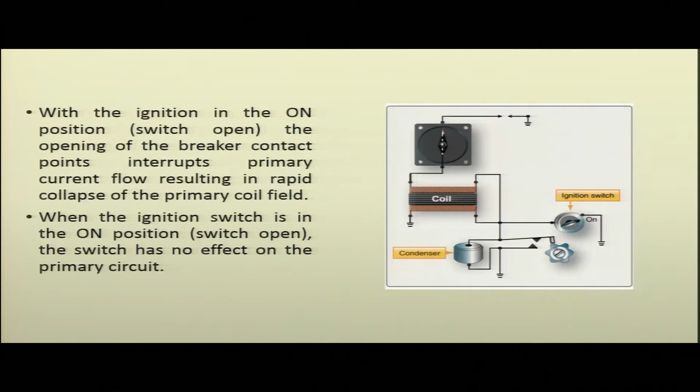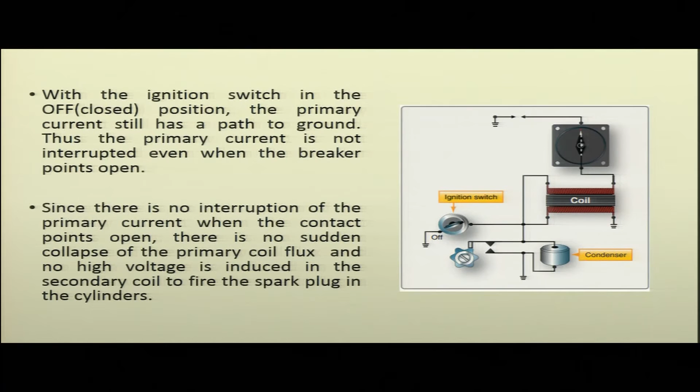With the switch in the off position, both magnetos are grounded and thus are inoperative.

With the switch in the left position, only the left magneto operates. With the switch in the right position, only the right magneto operates, and with the switch in the both position, both magnetos operate.

Dual ignition systems are checked by placing the ignition switch in the right and left positions, which allows the magnetos to be turned off one at a time. We will see in further lectures how to check the ignition system.

Certain precautions must be observed while working on the ignition system. The important point to keep in mind is that the magneto will be hot when the P lead is disconnected or when there is a break in the circuit leading to the ignition switch.

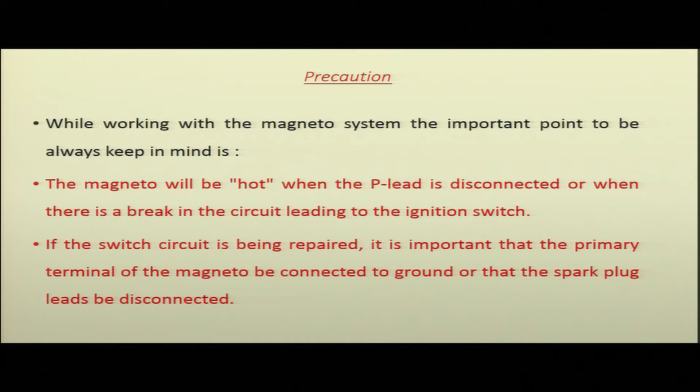If the switch circuit is being repaired, it is important that the primary terminal of the magneto be connected to ground, or that the spark plug leads be disconnected. Now, another important unit in the ignition system is the impulse coupling.

Initially, when the engine is started, the cranking speed is too slow to permit the magneto to operate.

The purpose of the impulse coupling is to give the magneto a momentary high rotational speed and to provide a retarded spark for starting the engine.

The impulse coupling is installed on the drive shaft of the magneto and comprises the shell, spring, hub or cam, along with fly weights. Here you can see the body, the fly weights, the cam, and the spring.

This impulse coupling is a spring-loaded mechanical linkage between the magneto shaft and the engine. Its purpose is to provide a high rotational speed to the magneto and a retarded spark for starting. It provides the high voltage necessary for ignition by winding up and letting go at the right instant for spinning the magneto shaft.

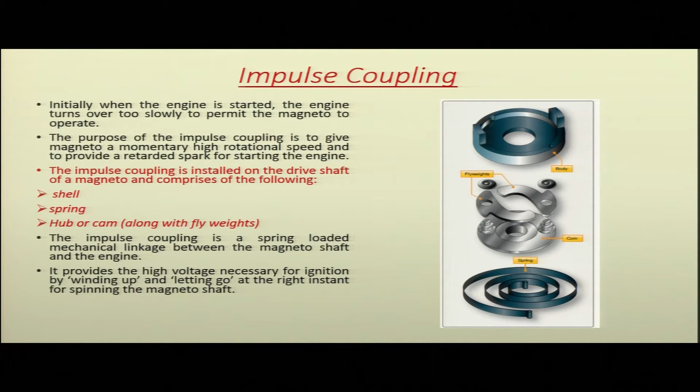Now let us see the position of the impulse coupling in the start position. You can see the figure here: these are the fly weights, this is the stop pin in the magneto body, and this body is attached to the engine drive. These are the pivot points of the fly weights, this is the stop pin in the magneto housing, and this is the trigger ramp on both sides.

With the magneto fitted with an impulse coupling, the shell of the coupling is rotated by the engine drive while the rotating magnet remains stationary. This causes the spring in the coupling to wind up.

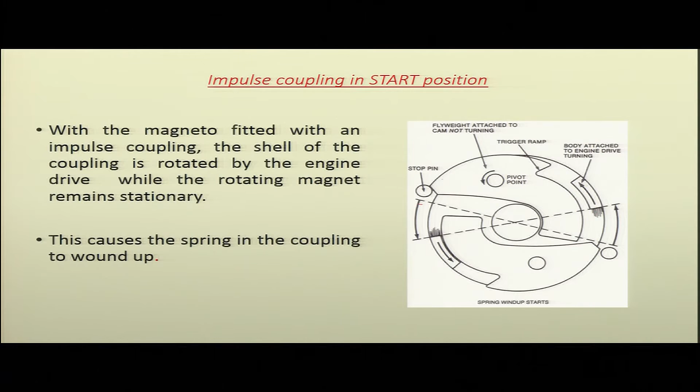As the shell of the coupling rotates, the spring in the coupling winds up. At the instant when the magneto is supposed to fire, the body which is contacting the trigger ramp, since it has rotated with the drive, is touching the trigger ramp.

In the previous picture, this body was away from the trigger ramp. Now, since the body has rotated and the rotating magnet was stationary, the body has moved and is now touching and contacting the trigger ramp.

Because of this contact between the body and the trigger ramp, the trigger ramp will release the flyweights, causing them to rotate on their pivot points. This push by the body on the trigger ramp causes the flyweights to rotate on their pivot point and disengage from the stop pin.

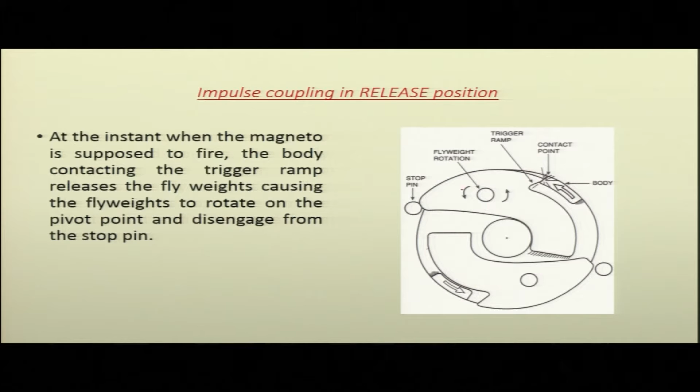So at the instant when the magneto is supposed to fire, the body contacting the trigger ramp will release the flyweights, causing them to rotate on the pivot point and disengage the stop pin.

Now what will be the position of the impulse coupling in the running position? As the flyweights rotate on the pivot point and disengage from the stop pin, the spring unwinds, giving the rotating magnet a rapid rotation in the normal direction.

This rapid rotation of the rotating magnet causes the magneto to produce a strong spark at the spark plug. In the engine running position, the centrifugal force will hold the flyweights in the release position.

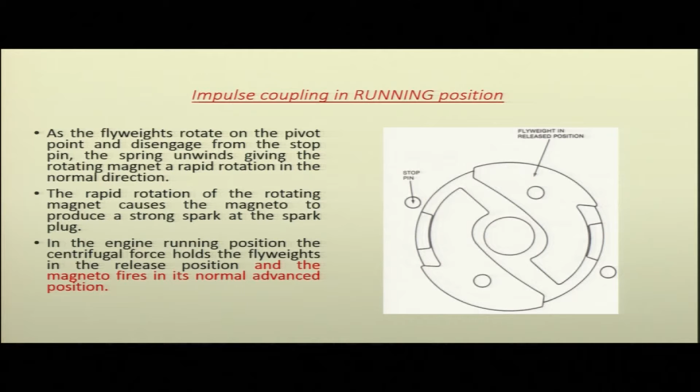Because of the centrifugal force, the flyweights are in the release position and the magneto fires in the normal advanced position. So in the running position, the magneto is firing in the normal advanced position and the flyweights are released.

The impulse coupling holds back the magneto rotation during engine startup, thus furnishing a retard spark during engine starting. The impulse coupling spring holds the magneto in the advanced spark position during normal operation, while during the starting condition, the magneto furnishes a retard spark.

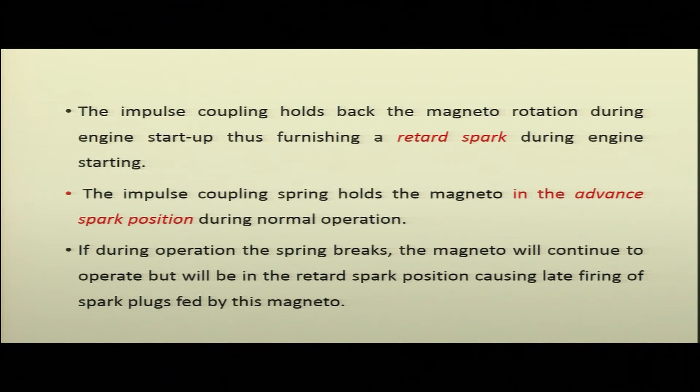Now in case during operation the spring breaks, the magneto will continue to operate but will be in the retard spark position, causing late firing of the spark plugs fed by this magneto.

Coming to spark plugs, the purpose of the spark plug is to convert the high voltage electric energy produced by the magnetos to heat energy to ignite the fuel air mixture in the engine cylinders.

The spark plug provides an air gap across which the high voltage of the ignition system produces a spark to ignite the mixture. In the figure, you can see the central electrode, and here the gap between the electrodes, which is there to provide a spark.

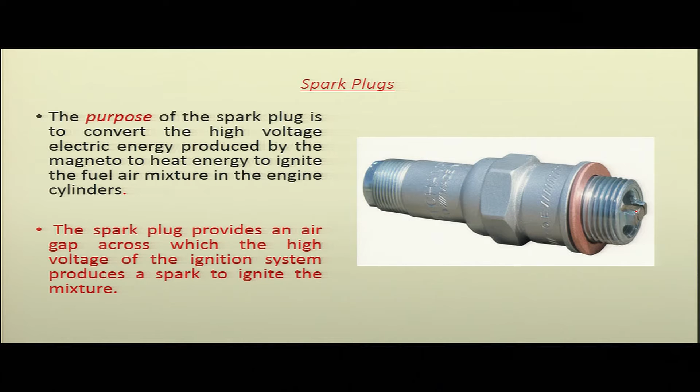The aircraft spark plug consists of three major parts.

Electrodes: you can see in the figure the electrode, then the insulator, and then the outer shell or metallic shell. So three main parts: the center is your electrode, then the insulator, and then the outer shell.

The outer shell is made of finely machined steel, plated to prevent corrosion from engine gases and possible thread seizure. It is threaded to fit into the cylinder, and the other end is threaded to receive the ignition lead from the magnetos. We will see how the spark plug is connected.

One end is threaded to be screwed inside the engine cylinder, whereas the other end is also threaded to receive the ignition lead of the ignition harness.

The cylinder gas pressure is prevented from escaping around the plug by using close tolerance screw threads and a copper gasket. Because there is high pressure in the engine cylinder and the spark plugs are screwed in the cylinder, we have to prevent pressure loss. That is prevented by providing close tolerance screw threads and a copper gasket.

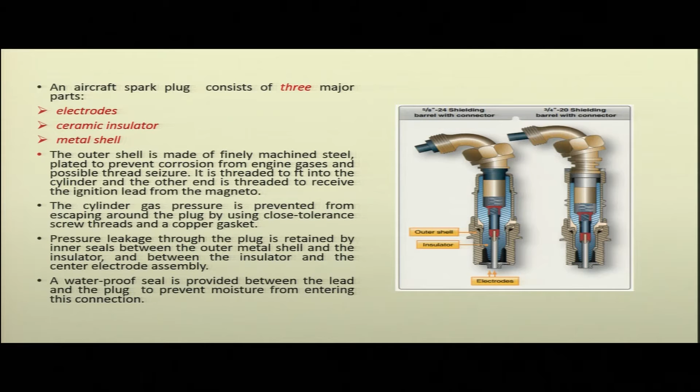A waterproof seal is provided between the lead and the plug to prevent moisture from entering this connection. So between the lead and the plug, you have a waterproof seal which prevents moisture from entering this connection.

The purpose of the insulator is to provide a protective core around the electrode. Here you see this is your electrode and you have the insulator around it. The purpose of the insulator is to provide a protective core around the electrode and transfer heat from the insulator tip or nose to the engine cylinder.

This insulator is made from aluminum oxide ceramic, which has excellent dielectric strength, high mechanical strength and thermal conductivity. It has various such properties.

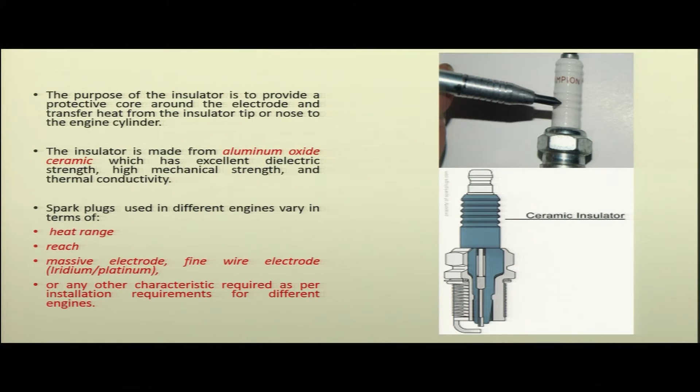Spark plugs used in different engines vary in terms of heat range, reach, massive electrode, fine wire electrode, or any other characteristic required as per installation requirements for different engines. So there are different types of spark plugs being used on engines, with different heat ranges, different reach, different types like massive electrode or fine wire electrode, or any other characteristic required as per the installation requirements.

The massive electrode are so named because of the size of the center and the ground electrodes. In the left figure, this is your massive electrode spark plug. You can see the electrode in the center. Because of the size of the center electrode and the ground electrodes, this is termed the massive electrode. Massive electrode type spark plug is a resistor type that reduces electrode erosion.

This is basically a resistor type of spark plug. The center electrode comprises a copper core with a nickel alloy sheath around it. The center electrode is sealed against gas leakage by a metal glass binder, to prevent gas leakage.

In the right figure, these are your fine wire spark plugs. They are similar in construction to the massive electrode plug except for the electrodes. Here if you observe the electrode in the center, as compared to the massive electrode, this is a fine wire electrode. They are similar in construction except for the center electrode.

The center electrode of the fine wire spark plug is made of platinum, and the two ground electrodes are constructed of either platinum or iridium. The use of platinum and iridium ensures maximum conductivity and minimum wear.

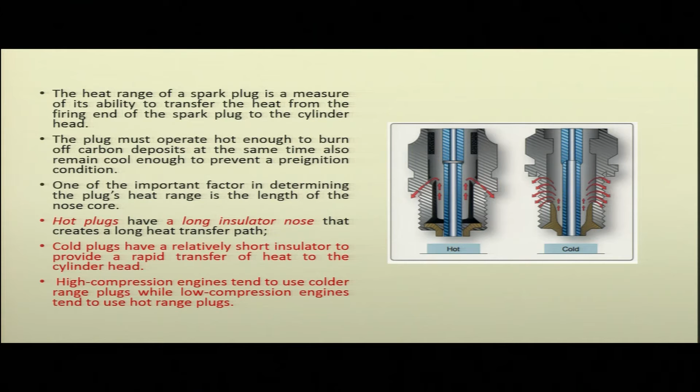Cold plugs have a relatively short insulator path to provide a rapid transfer of heat to the cylinder head. High compression engines tend to use colder range plugs, while low compression engines tend to use hot range plugs.

The spark plug reach is the threaded portion of the spark plug that is screwed into the spark plug bushing of the cylinder. You can see this is the threaded portion, and this is the reach. We read earlier that the spark plug has two threaded ends: one is screwed inside the engine cylinder, and the other receives the ignition lead. The end that goes inside the engine cylinder is the reach of that spark plug.

Proper reach spark plugs ensure the electrode end of the spark plug is at the right position to fire. It is very important to use the right reach of spark plugs so that the electrodes are at the right position to fire in the engine cylinders.

In case long reach spark plugs are used, they will extend into the combustion chamber and their threads will be exposed to carbon. If carbon clings to the spark plug threads, it can become a source of pre-ignition and can also make it very difficult to remove the spark plug.

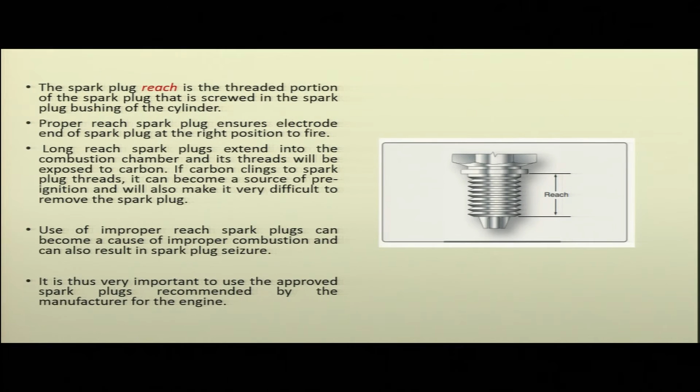Use of improper reach spark plugs can cause improper combustion and can also result in spark plug seizure. It is thus very important to use the approved spark plugs recommended by the manufacturer of the engine.

This was all about the basic ignition system of a reciprocating engine. We have seen the various parts and the basic theory involved, the items and units of the ignition system, the switch which controls it, and the basic theory of the magneto. We saw the different parts of the magneto like the magnetic circuit and the magnetic rotor, then the primary circuit including the primary coil, breaker contact points, and capacitor, and their functions. Finally, we saw the secondary circuit and how the magneto was operating.

We have seen the ignition harness, how it acts as a conducting path for the high voltage developed in the magneto. Then we saw the spark plugs, the different types, the purpose of the spark plug, and the importance of using the right type as recommended by the manufacturer. This was all about the basic ignition system.

During the course of maintenance and operation, we may encounter several snags and problems, both during flying, ground operations, and maintenance. Some of these problems have been summed up here, and let us see what problems we face in the ignition system.

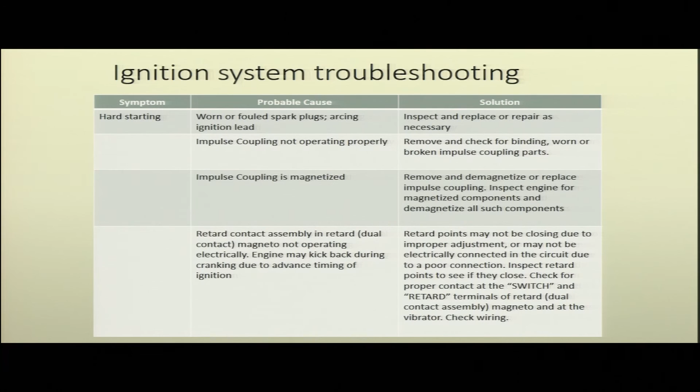Now this was about the probable causes of hard starting of the engine. The second problem which may be encountered is rough engine operation. Engine is operating rough, so what may be the reason?

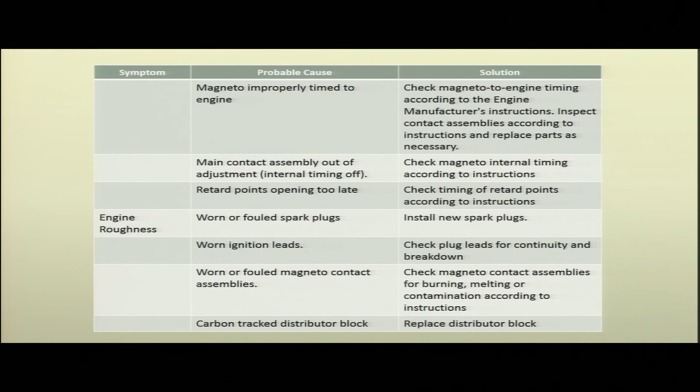So we should inspect the magneto contact assemblies for whether they are burnt out, melted, or contaminated. Whatever needs to be done, we need to either perform the maintenance action or replace it completely. For a carbon tracked distributor block, it is better to replace the distributor block.

Another problem is magneto drop off check out of limits. So your magneto drop is out of limits. Let us see what are the reasons.

So there are several causes of magneto drop out of limits. Let us see one by one. In case your magneto to engine timing is incorrect, we need to time the engine as per the manufacturer's recommendation.

In case the contact assemblies are not opening properly, as per the manufacturer's instructions we need to inspect the contact assemblies and take appropriate action of either cleaning or replacing them.

If the main contact assembly is out of adjustment, that is your internal timing is off, then we need to check the magneto internal timing as per the manufacturer's instructions.